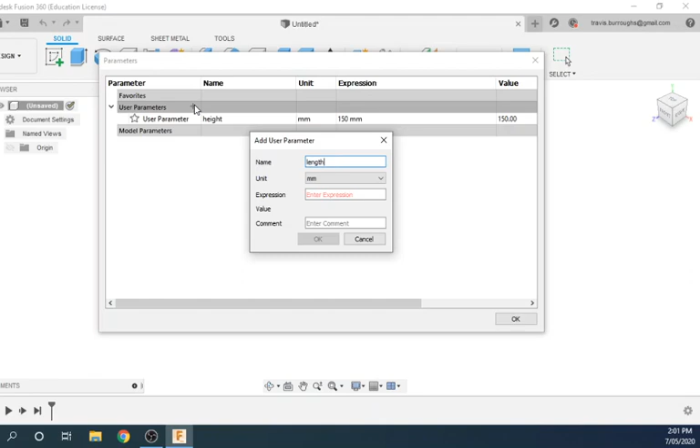So I want the height of my sign to be 150 millimeters. I want the length of my sign to be, let's say, 600 millimeters. The thickness of the material, I want that to be, let's go 17 again. So just some basic things there.

Easy enough to do. So once I've got that, I can go OK, and I'm going to start a sketch. Now, this is for this specific assignment, we're going to be looking at CNC technology.

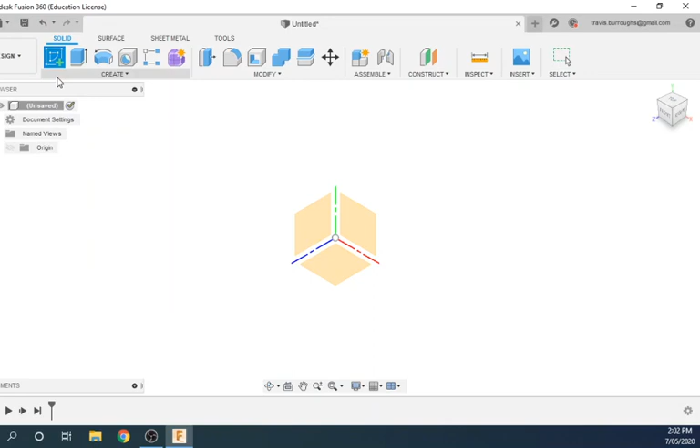So we want to be careful where we're picking. To do our sketch, we want to be on the XY plane. So that is this one here. There's a green plane, which represents Y, and a red plane that represents X. Now, if we pick the wrong one, we can fix this later, but it will make your life a lot easier if we pick the XY plane, so the green, red plane.

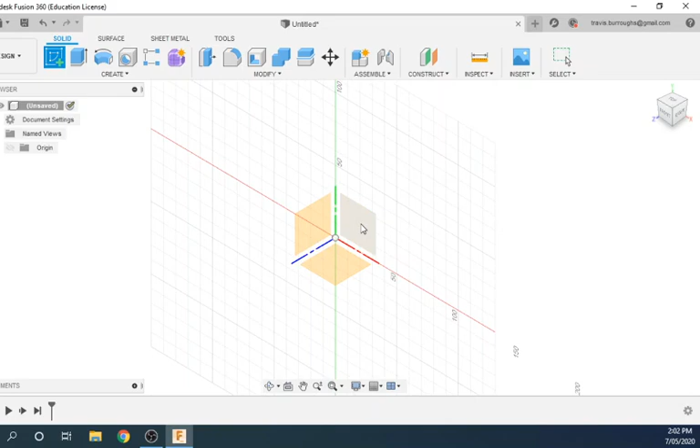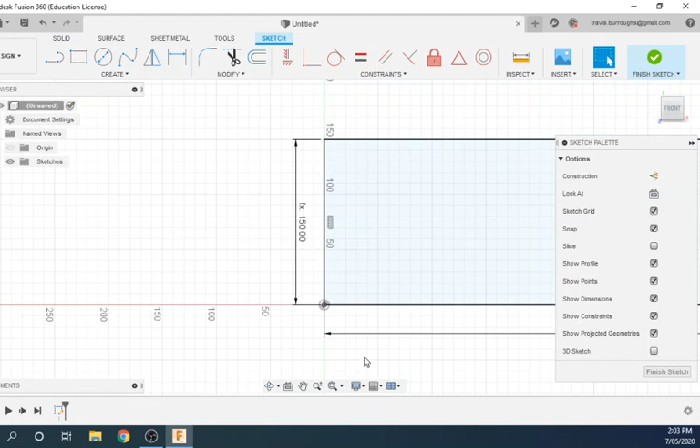All right, so I click on that, and I'm going to start by drawing a rectangle for my address sign. So if there's my rectangle tool, come down here. And I want this to be my height by my length. So I type those in, enter, and now I've got a parametric rectangle that I can start for my sign. So from there, I'm just going to go finish sketch and extrude.

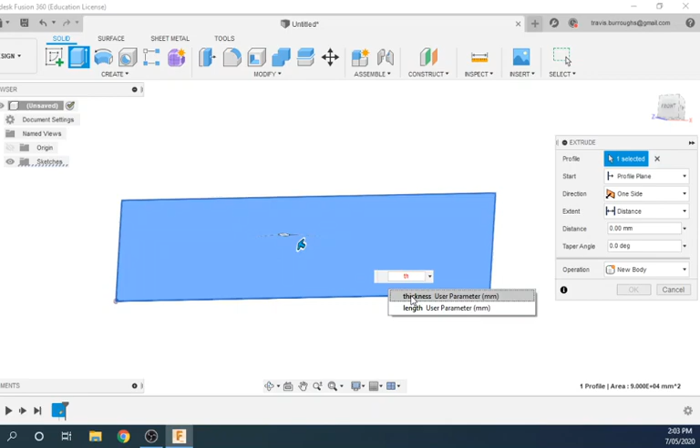And I'm going to take this and we are going to extrude it that thickness. Oops, close that, hit the wrong keys again. All right, so here, we want this to be our thickness, and OK. So now we're left with just the basic shape of what our address sign is going to look like.

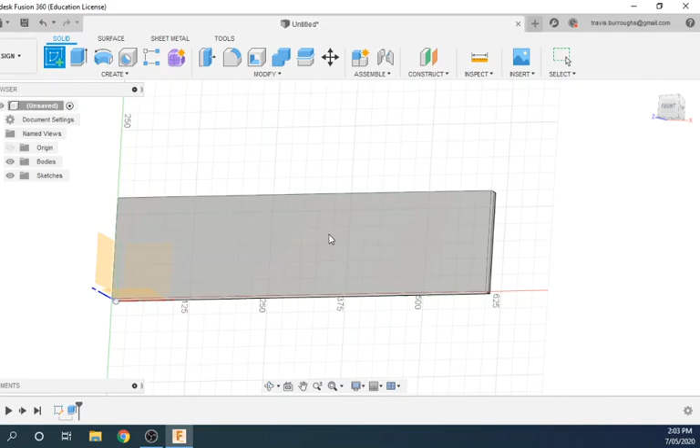Next thing is we need to actually put the address on there. So making sure that I'm still looking at the front, okay? Still looking at that XY plane from the front. I'm going to create a new sketch on the surface. So now I'm back in this space.

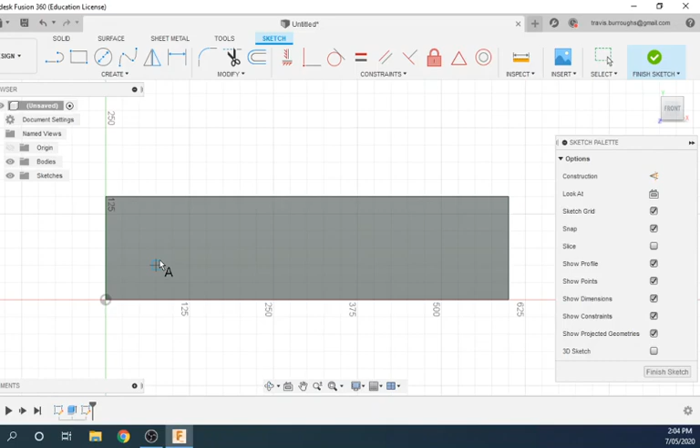Now, I'm going to put a rectangle around here eventually, but first I want to deal with the text. So if I come down here, I've got a text tool. If I click on that, it'll allow me to place text on my screen. I'm just going to come down to the lower left corner. Seems my mouse is being a little silly. I'm just going to come down here and click. And I can move this around now that it didn't want to be in the right spot.

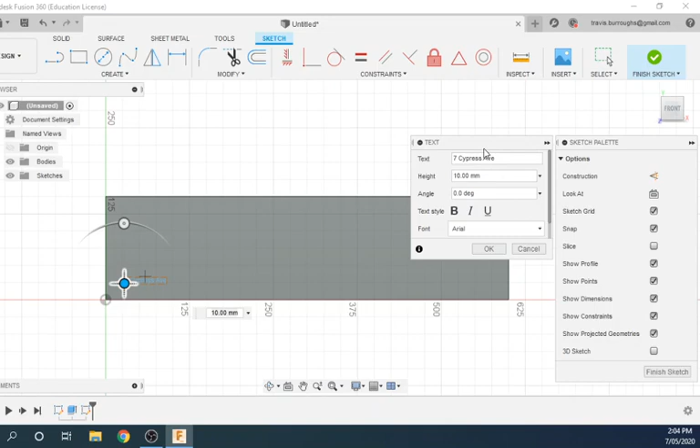And we're going to type in our address. So today we are at 7 Cypress Ave. Now you could drop the Ave if you want. It just depends how much space and how big you want this to be.

Now if we look, it is quite small. So we can play with our sizes here. So let's say I want this to be 100. Okay, that looks a little better in the height. Bit long. Now I could adjust that, but the font's not very nice either.

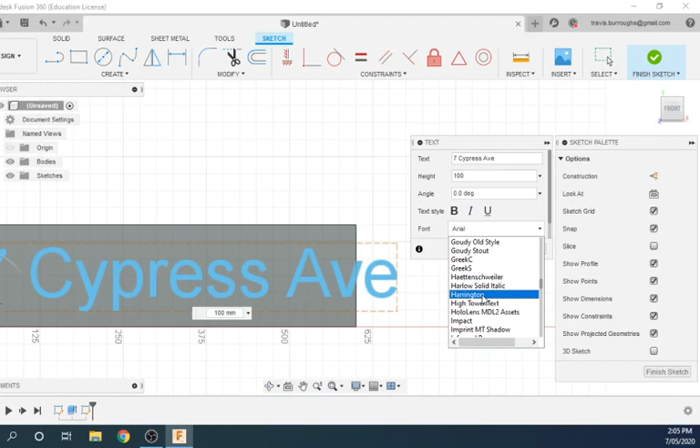So you do have the ability to come through and pick some different fonts. There's tons. Just pick something that you like. The more complicated the font though, the harder it is going to be to machine because there's so many little pieces to it. So you want to keep the lines of the letters thick, but simple.

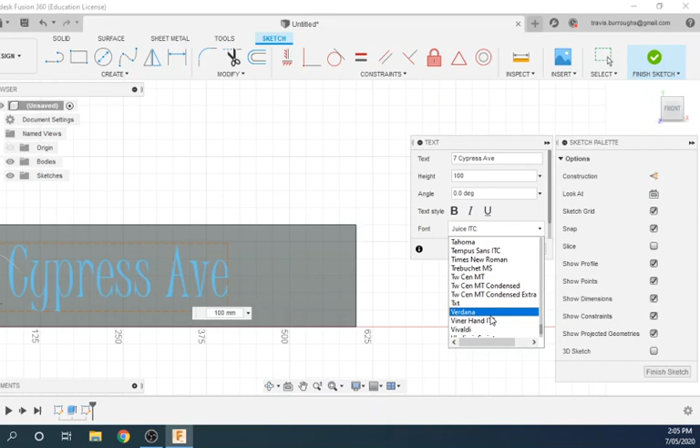Let's see what we have here. Quite a few. You can see Fusion has got just a ton of built-in fonts. Tahoma. Oh, that's not going to work. Too thin.

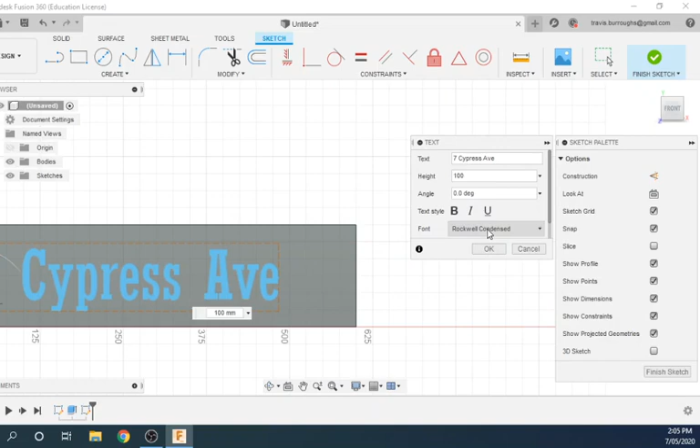Nope. That's getting better. Almost there. That's way too detailed. And again, you can pick the one you want. There's tons, I'm just really looking for something that's going to fit on the screen.

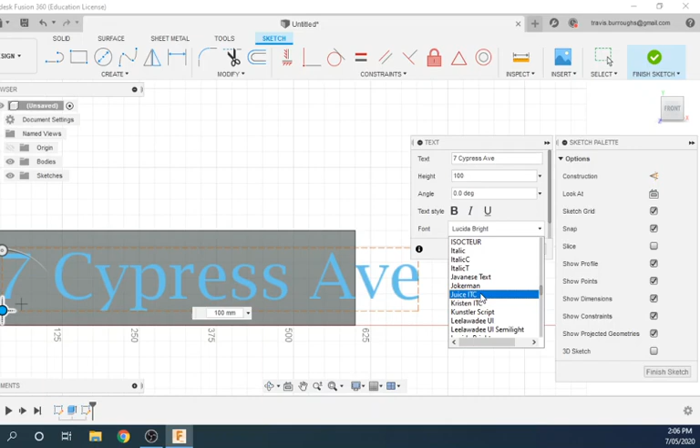Alright, so this one's looking okay. I think for the case of my address here, I'm going to bring that up and drop the Ave, so it's just 7 Cypress. Center it up best you can, and I'll go okay. So now I've got that text laid out. Now you could go in and make that 7 larger, you can play with this all you want, but in the case of this tutorial, we're just going to keep things simple.

Alright, so the next step, I'm going to take a rectangle and draw a rectangle in around my address. Now I've got no constraints on this.

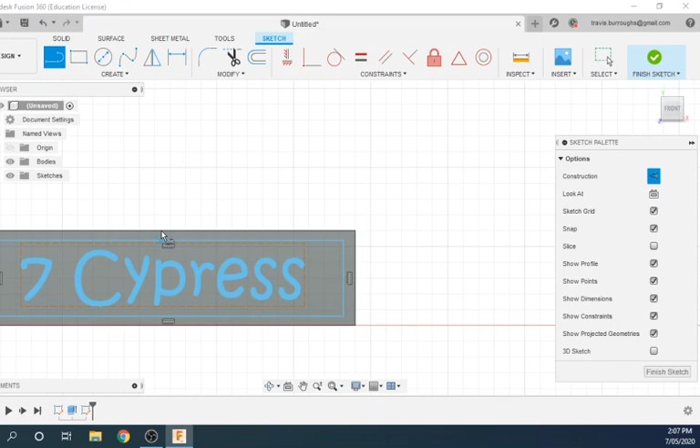So the next thing that I really want to do is put in some construction lines that I can dimension off of. To do that, I'm going to grab my line tool, and come over to my sketch palette and select construction. This is going to give me a different type of line that I can use to dimension things, but it won't affect extrusions. So I move my mouse over till I get that triangle, which means midpoint. I'm going to draw a line down, midpoint to midpoint. Midpoint there to midpoint there. So I've got my construction lines in.

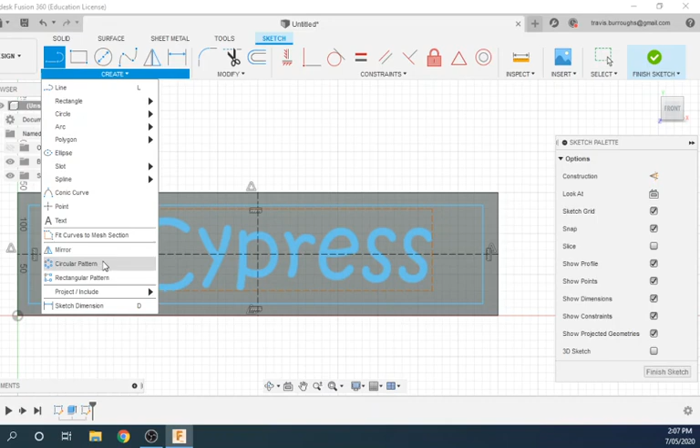Now I can come back and go sketch dimension, and I want the distance from here to here. Let's make this length divided by 2 - so length divided by 2 would make it the whole length of our piece. So let's say length divided by 2 minus 25. So we've wrote a little equation there which is going to make this thickness here 25 mils.

Now I could come in here, if I wanted that a bit thinner, we could say 10, and that's going to make it a bit thinner. So it's up to you where you want that. I think I'm going to keep it at 25 just so I've got some space to - actually let's say 20, just to screw it in.

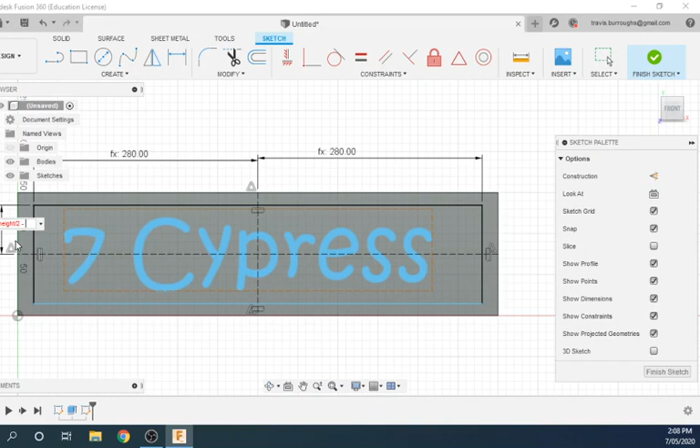Over here I'm going to do the same thing. I can just click on that dimension and that'll take it. We're going to dimension from here to here. Now again, this was height, so if I say height divided by 2 minus that - what did I say, 50 - that'll make it the same dimension, and from here to here I'll do the same thing. So it looks good.

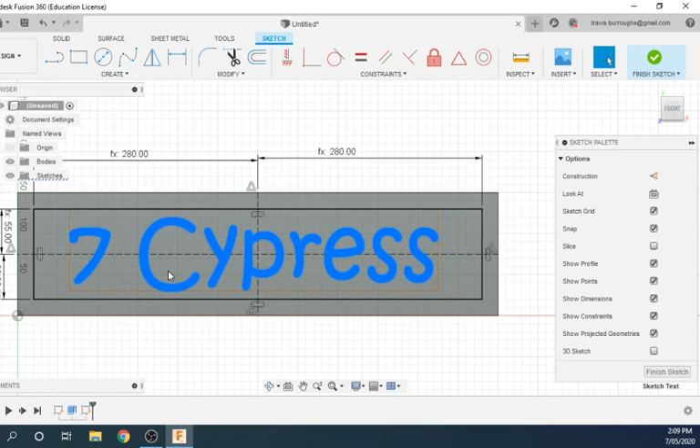I've got my font sitting in there. Now at this stage I could hit escape, click on this, move it around, just get it so it's pretty much where you want. You just want to make sure you got even distances above the letters and in between. So, like that, I can go finish sketch.

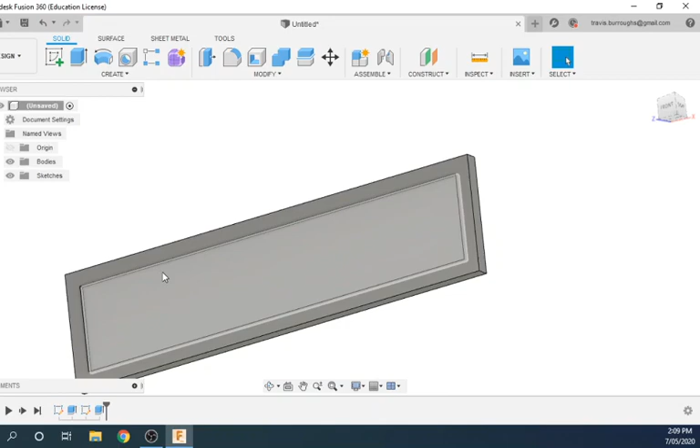And extrude. I want to take this and extrude it in, let's say 6 millimeters - let's go -6, and that's going to cut it in. And you'll see that my font has disappeared. Now, to get that back, I can come to sketches and turn the sketch back on. So there's my text again.

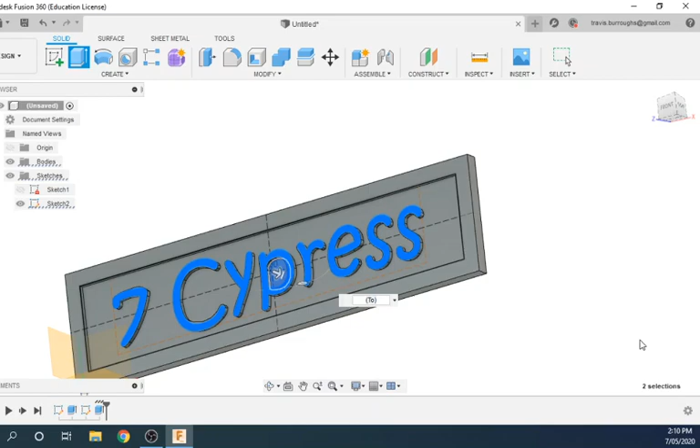And I'm going to go extrude again, grab that font, and this time instead of extent, I'm going to change it to object. Click on the back, and go OK. And what that's going to do is extrude it through. I can turn off that sketch now, and you can see there is my 7 Cypress address sign for the school.

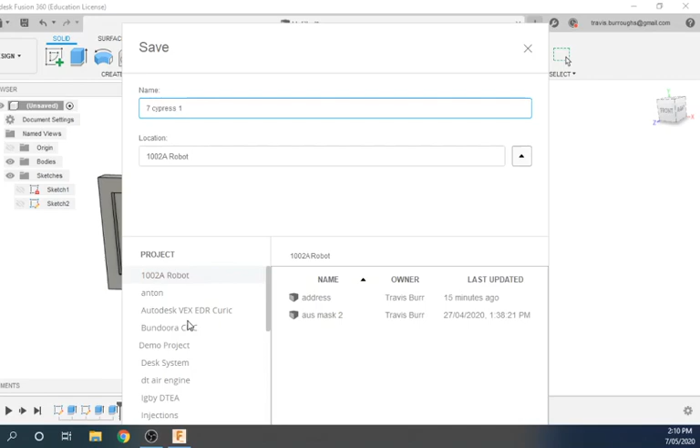So that's part 1. I'm just going to save this just to make sure that we don't lose it. And we'll save it to a folder that's not the robotics account - save that to demo projects and save. So now we've got that file ready to go for the next video. Hopefully that shouldn't take you too long.